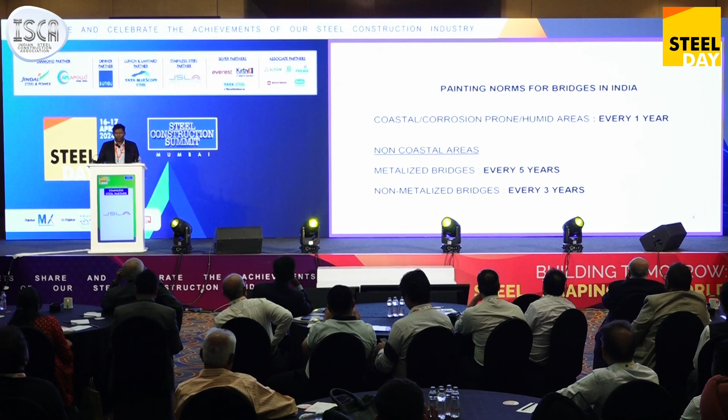So these are the norms of painting or maintenance of bridges in India. In coastal regions, it is mentioned every year, and with metallizing, we have 5 years of maintenance, and non-metallizing every 3 years. But despite all these efforts, bridges fail, and the average life of a bridge is only 60 years.

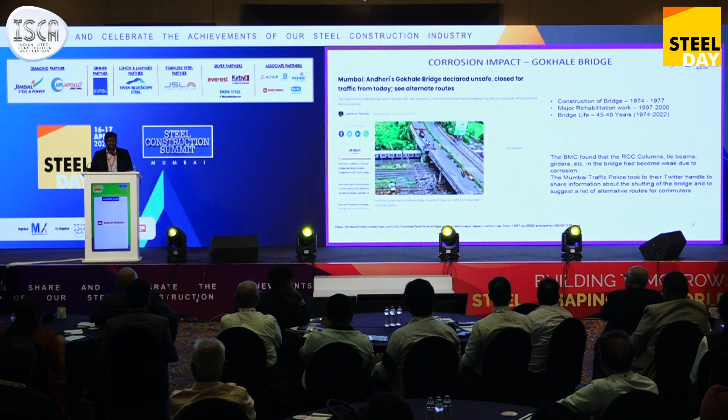Some of the examples I would like to highlight here. One is Gokhale Bridge, which was initially designed for 60 years of design life. However, now it is getting replaced after 40 years of life, even though it had a major repair work after 20 years of service. So IIT has mentioned that corrosion is a main concern, and that is why the structure is not in good condition.

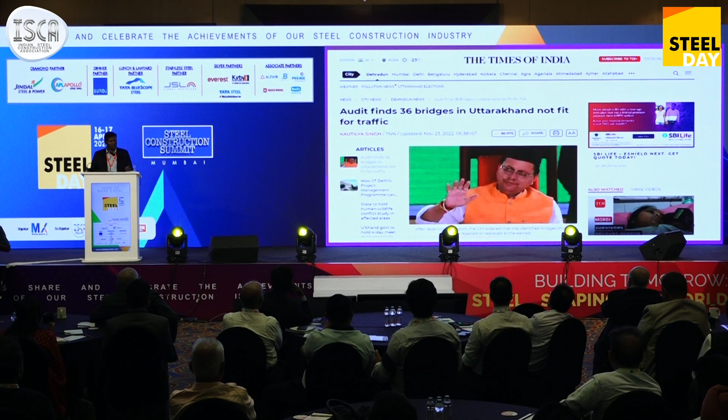And some more examples of corrosion related issues - these are some of the news articles. There is a big need of a better material, how we can counter this.

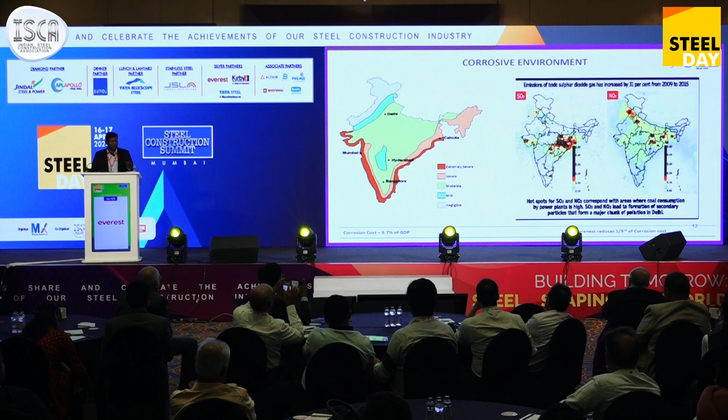And this corrosion map we have seen many times. You can see it has been classified into extremely severe, severe and mild conditions. The right side image is the pollution map of India. When it combines with the corrosion atmosphere, the maintenance requirement is increasing and the service life reduces. And corrosion is a cost, and it can be reduced by 33% if you go for a better material, as per the studies. So is there a solution?

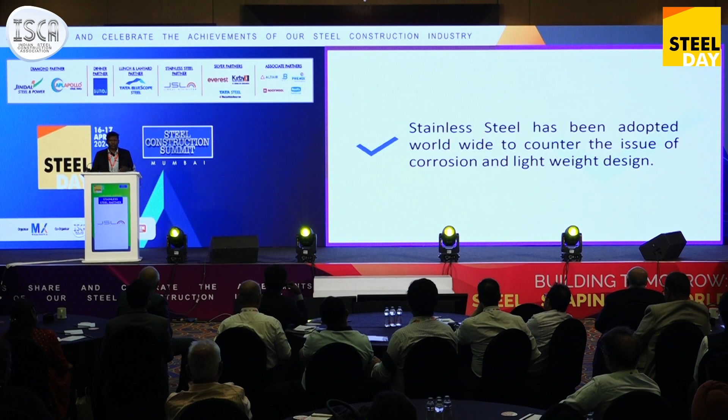Yes, we have a material: stainless steel. Worldwide, this has been adopted to counter the issue of corrosion and reduce maintenance. And for those who are new to stainless steel, here is one slide for you.

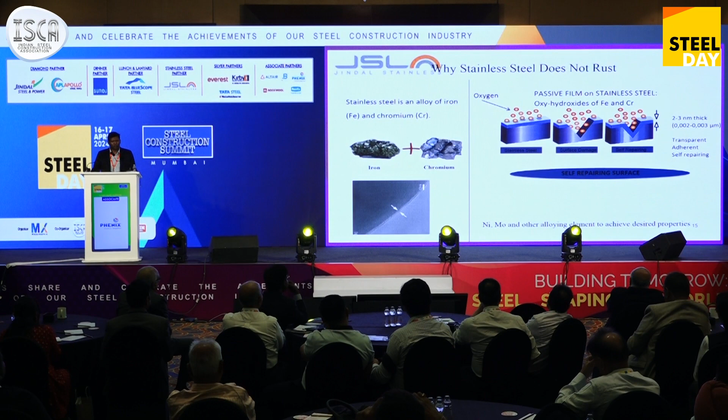Stainless steel is nothing but an alloy of iron and chromium. When chromium is added, it forms a chromium oxide layer on the surface that protects the material from getting corroded. Even if it gets scratched, the chromium available inside the material combines with atmospheric oxygen and forms a chromium oxide layer. So it is a self-repairing film which forms. It is not visible to the naked eye, but it protects the material.

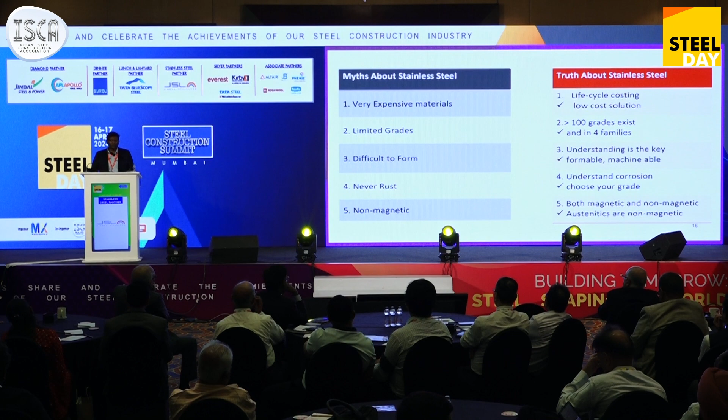It never rusts, stainless steel - again, it is about understanding the atmosphere and the situation, the location where it is going to be used. Right selection of material is also important. Many times we misunderstand stainless steel as non-magnetic - that is not the case. There are both magnetic as well as non-magnetic grades existing.

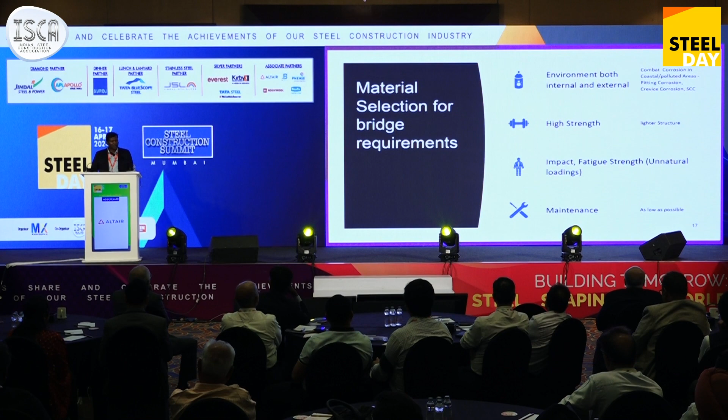For a structural consultant, these are some of the factors they consider before selecting a material for bridge applications: where it is going to be used, whether the structure can be light enough, and for cyclic loading, it should withstand, and maintenance should be as less as possible. And stainless steel fits the bill.

It offers all the advantages of being maintenance free. With higher strength, you can reduce the structure weight, and it is also sustainable. We will be talking about it in detail. These are the four different major types of stainless steels: classified into austenitic, ferritic, duplex, and martensitic.

For selection of a stainless steel grade, there are different factors. One is cost, because the higher the alloying element of a stainless steel grade, the cost is going to be higher. So right selection of the alloy is important, and degree of corrosion is also important. What is the design life we are expecting from the structure, and what is the strength level we are expecting.

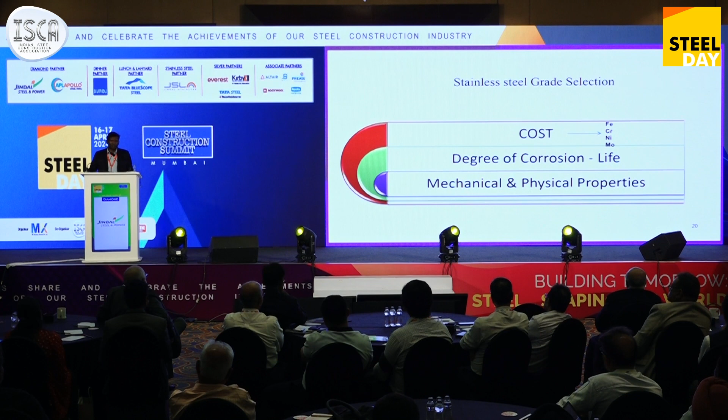So these are some of the five commonly used grades for structural application. The first one is the 300 series. It offers very good corrosion resistance but lacks strength. The bottom one is duplex stainless steel, which offers high strength as well as corrosion resistance.

The middle one is IRS 350 CR grade. It has been recognized as a replacement for carbon steel with a design life of more than 100 years. And railway has given this name IRS 350 CR - IRS, Indian Railway Specification; 350 is the strength; and CR is corrosion resistant.

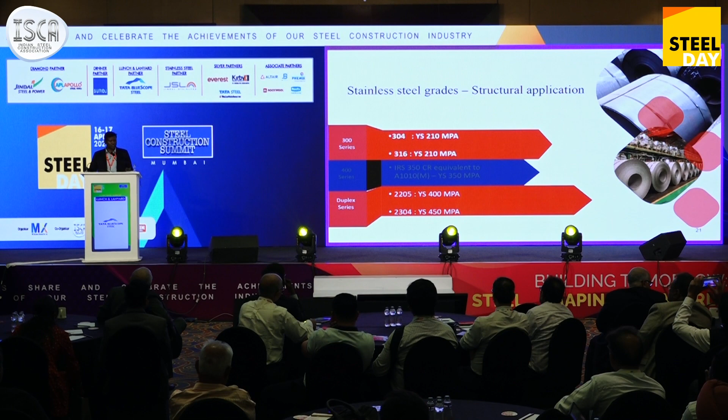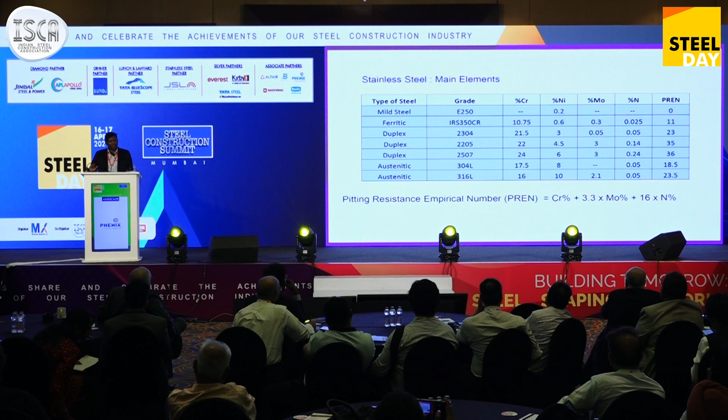PREN - this is the formula, pitting resistance empirical number. To simplify it, the higher the PREN number, the better the corrosion resistance of a material. So even though the ferritic variant IRS 350 CR is less than other stainless steel variants, it is almost 11 times better than carbon steel.

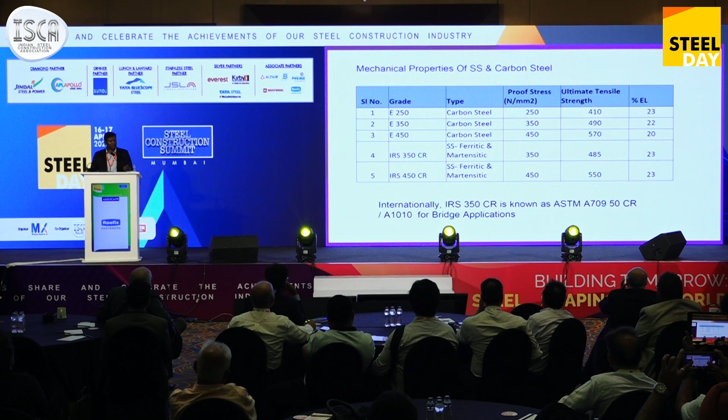Strength-wise, mechanical property-wise, if you compare, stainless steel grades offer better performance with better toughness as well. These are some of the performance results of IRS 350 CR conducted by IITs and other major institutes. It is almost 50 times better than carbon steel.

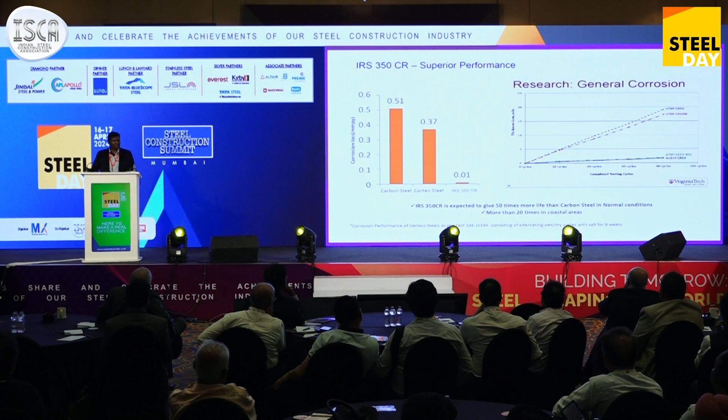In terms of fatigue properties, it is also similar or better than carbon steel, and fire performance is also better than carbon steel. It can withstand the strength for a much longer time in comparison to other materials.

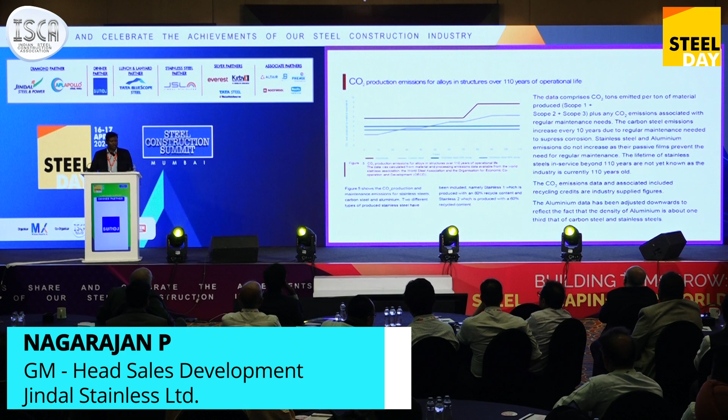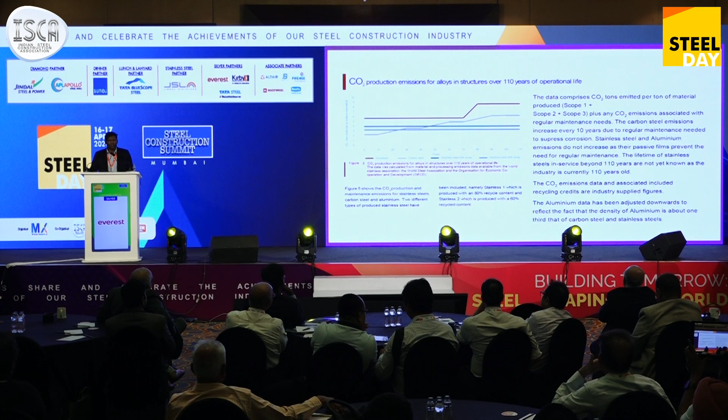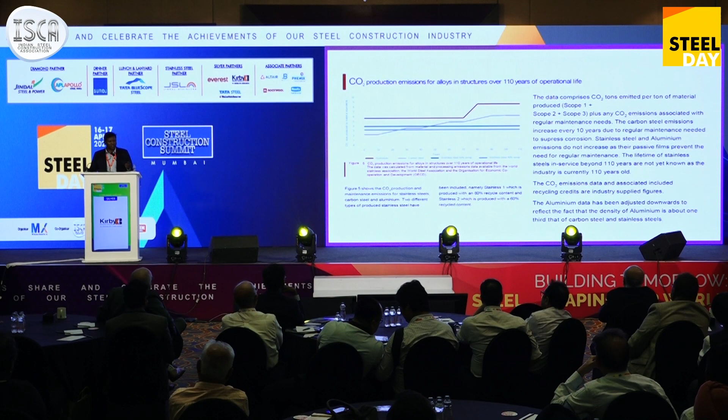Yesterday our director was mentioning about sustainability, and even though carbon emissions are not the only criteria for talking about sustainability, carbon emissions can be reduced by almost half by going for stainless steel over a service life of 110 years. These are the data released by the World Stainless.org website.

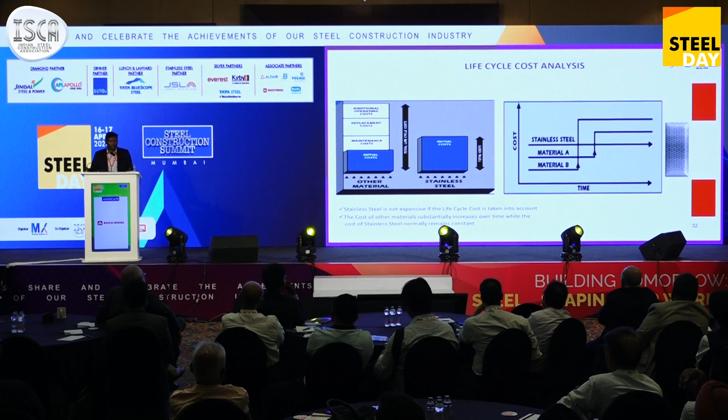I'll skip this - life cycle costing I was mentioning. If you compare the initial cost, maintenance cost, replacement cost, and end of service life cost for stainless steel versus other materials, stainless steel scores better. Even though the initial cost may be slightly higher, during the service life, if you account for all the calculations, it comes down, and it is possibly the cheapest solution.

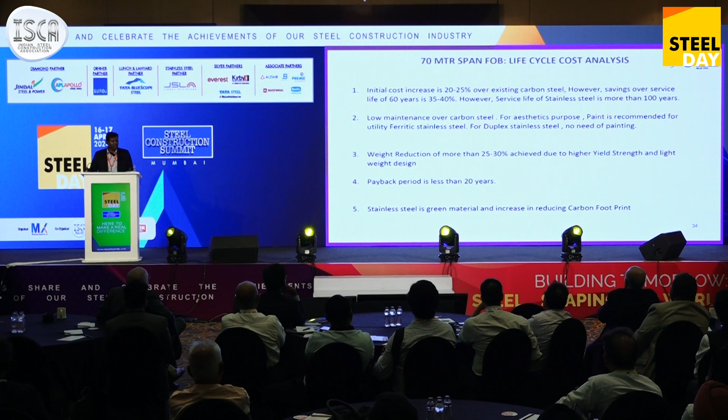There is also a policy issued by the Ministry of Finance to use LCC principles to finalize any construction project. This is the first project approved by railways, and they have done the LCC calculation. This is done by railways.

This is the actual case study of LCC for one of the projects, Bhayandar station. You can see the initial cost increase is not beyond 25% if you compare steel to steel, and the overall project cost increase is less than 5%.

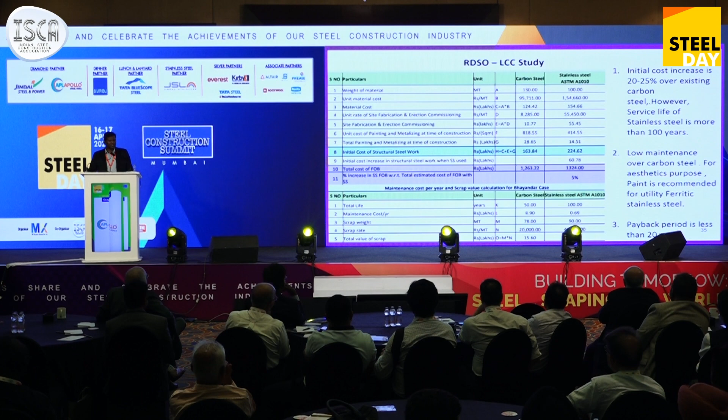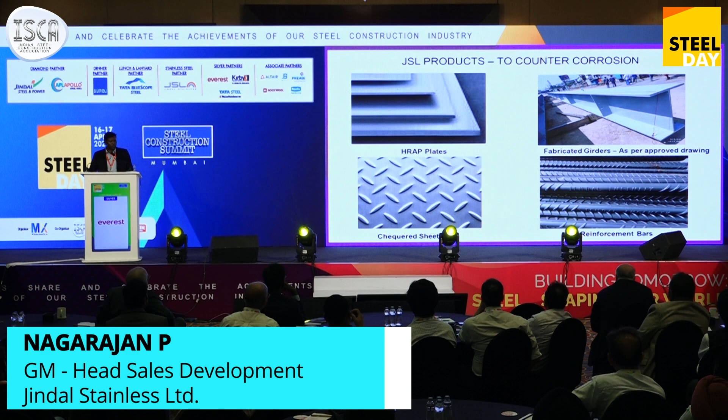Some of the Indian initiatives we have done so far - at Jindal Stainless Steel, we offer the following products to counter corrosion issues. First, we started with stainless steel plates. Then we got into fabricated components as well. Now we offer fabricated girders under the JSL brand. We also have stainless steel rebars and stainless steel checkered plates. I'll take you through one by one.

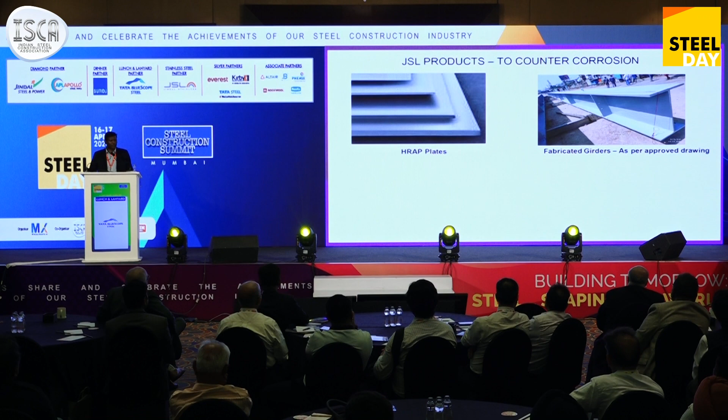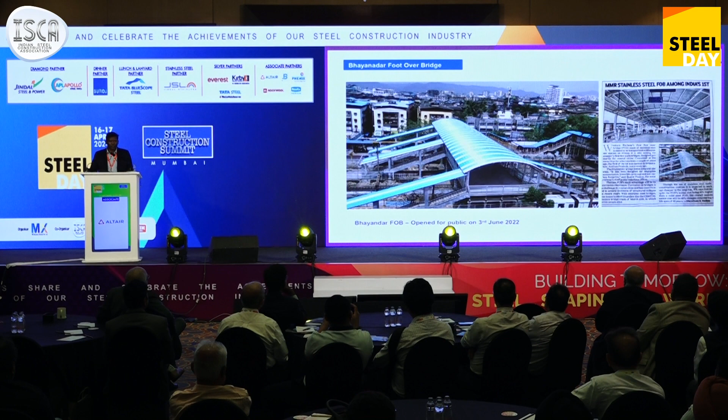Naupada and Srikakulam - these are the first FOBs inaugurated and they are in service. And Bhayandar, that is in Mumbai. You can go and have a look; it is also open to the public.

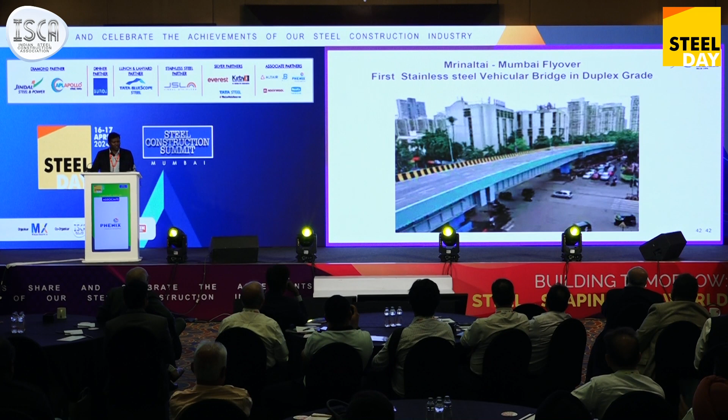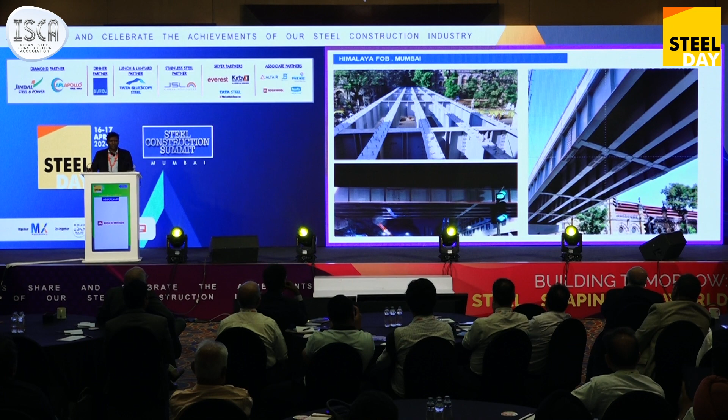Not only foot over bridges, even road bridges are also being constructed. This first project is also completed with duplex stainless steel. Here are images of it. The Himalaya FOB at CST station, which had a failure, that project is also completed with stainless steel.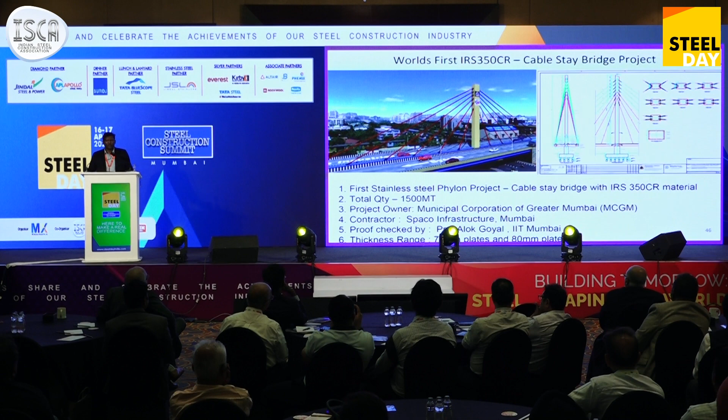This is to give you confidence that even though we have started with a small FOB now, we can get into road bridges, flyovers, and road over bridges. Not only bridges, even buildings are now using stainless steel.

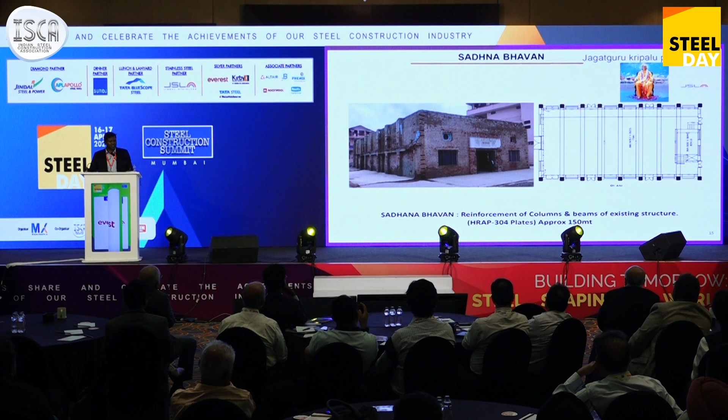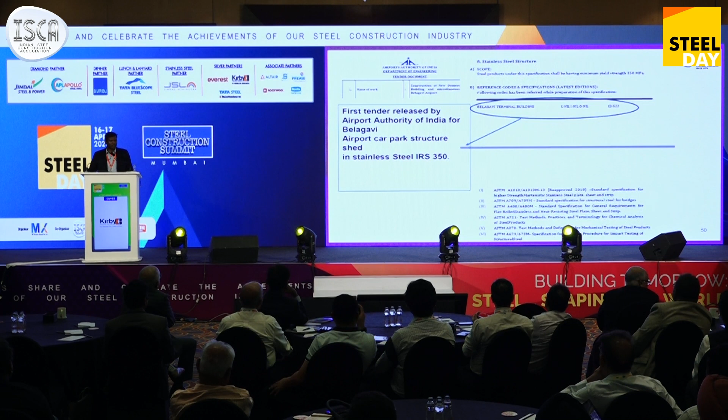This is one of the projects. Now they are strengthening it with stainless steel. Airport Authority has also issued a tender as a trial project for entire car parking with stainless steel tubular sections. The first stainless steel building has also come up in India, in Chennai, at United Insurance Company's headquarters. All these diagrid structures are load-bearing members and are made of stainless steel 316L grade.

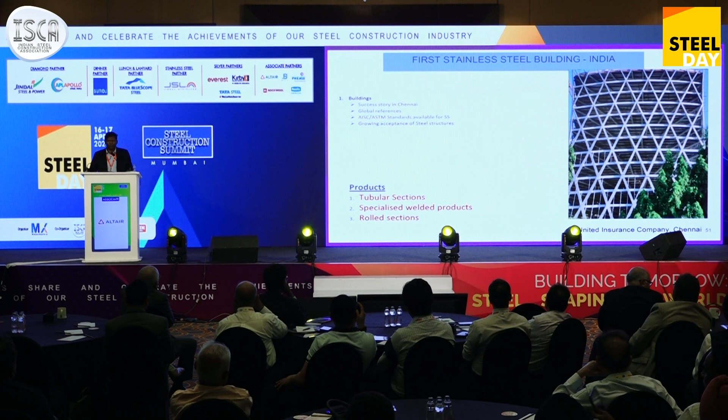There are a lot of policy issues and policy letters issued by different agencies. Railway has issued the first letter on using stainless steel in corrosion-prone areas for FOBs as well as ROBs. Schedule of rates are also available. Madhya Pradesh PWD has issued a schedule of rates for stainless steel plates, girders, as well as rebars and checkered plates.

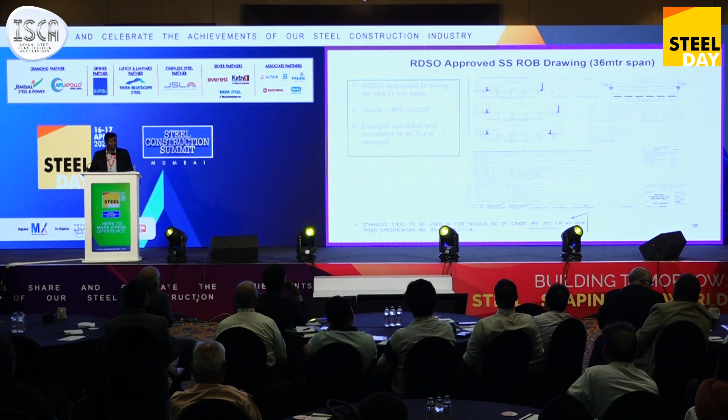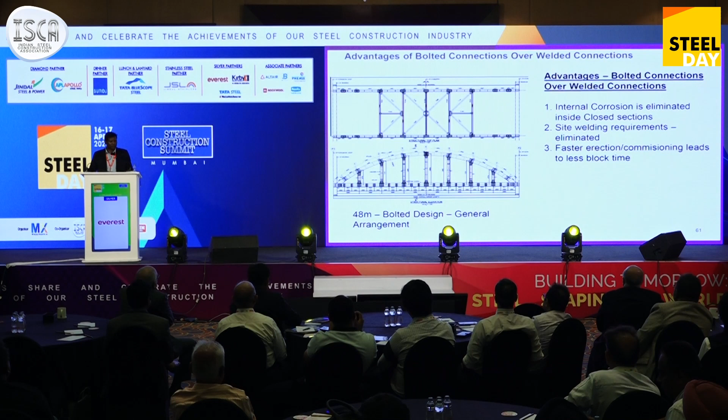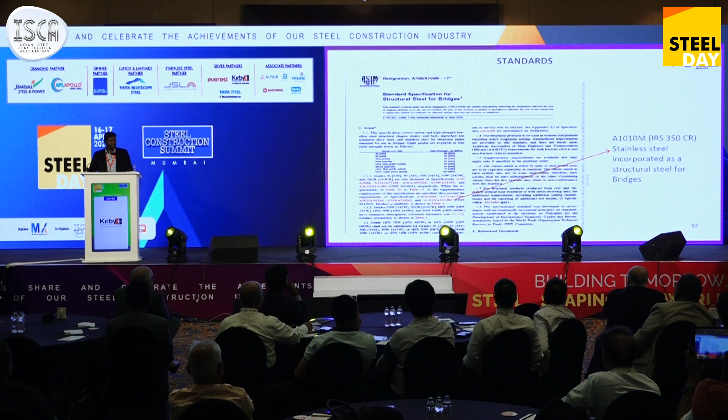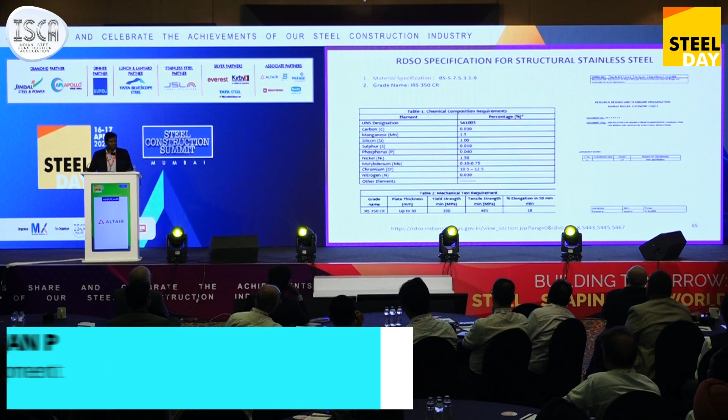These grades are not very new. This material is already a part of international standards. ASTM A1010 is the grade name given by ASTM standards, and this is also part of the bridge standard. RDSO has already issued a technical specification for using stainless steel. This information is available on their website as well, and anybody can download it. The welding process and fastener usage, everything has been mentioned in that technical specification.

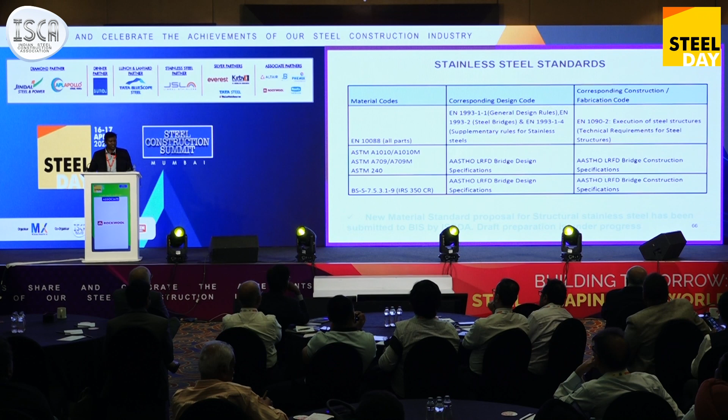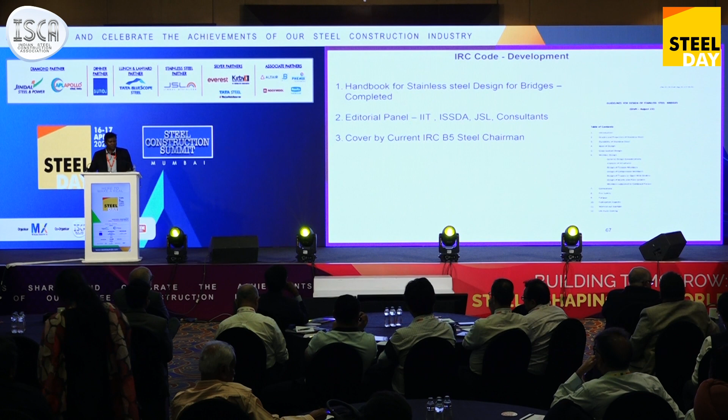The Indian code standard is under development. The draft standard has already been submitted to BIS. Testing is going on, and within about 6 months we are expecting the Indian code to be released for stainless steel usage in structural applications as well. Not only BIS, even the IRC is interested in developing a handbook for designers and structural consultants for using stainless steel, and the draft has already been developed. In the upcoming IRC conference in the month of June, it will be released.

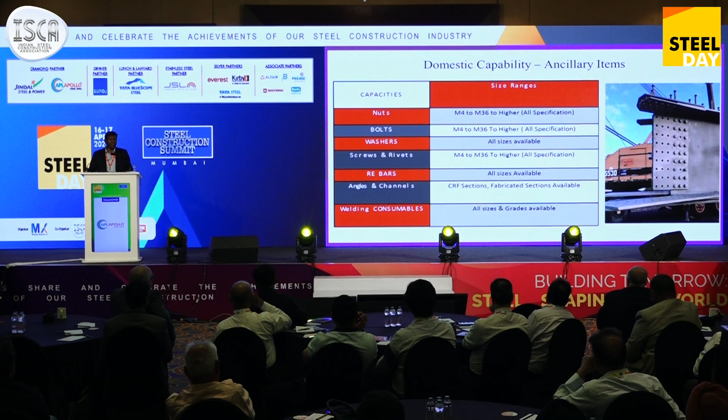A lot of fabrication manuals and the whole ecosystem already exist. A bridge cannot be completed only with plates and girders - we need nuts, bolts, consumables, everything is available. And if anybody finds difficulty, we are there to help.

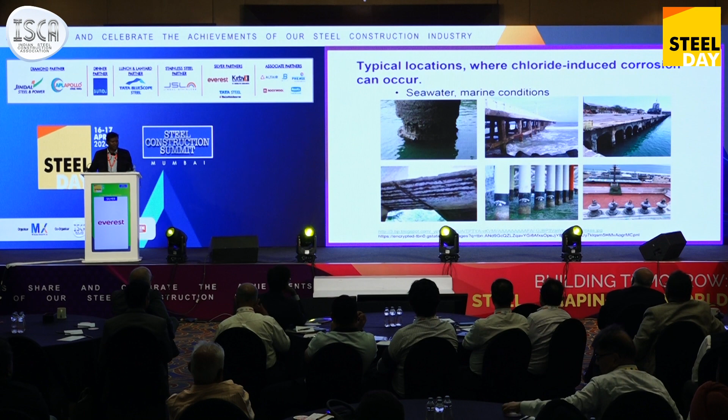Stainless steel rebar is the other product we have been supplying to different projects. Indian standard is already available, with almost 7 grades in the system. It is available at the same strength levels as carbon steel rebars, but we don't have the D variant of stainless steel rebars because stainless steel offers better elongation, more than 20%, even though the code requires only 14.5%.

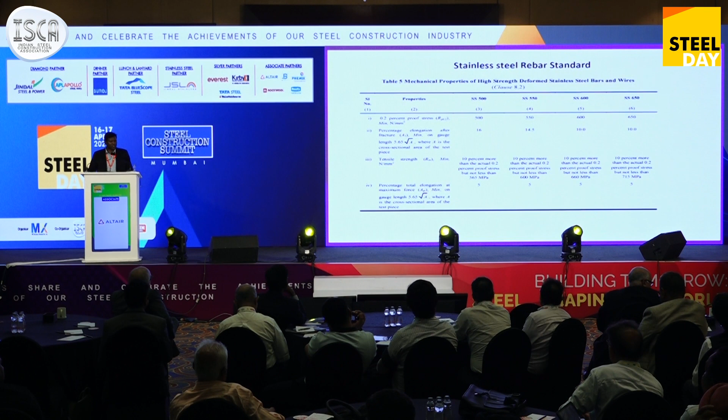Policy letters are also available from railways for use up to 30-kilometer radius, recommending stainless steel rebars. Even highways have made stainless steel use mandatory up to 15-kilometer radius, and it is also in the process of being increased to 50 kilometers.

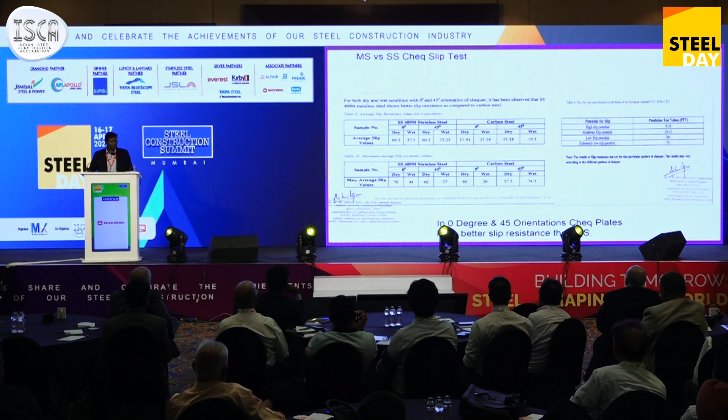The last product, covering 1 or 2 slides, is checkered plates. Now all the properties are better, be it wear resistance, slip resistance, or abrasive wear resistance. RDSO has issued a policy letter on using stainless steel checkered plates in all the pathways on bridges.

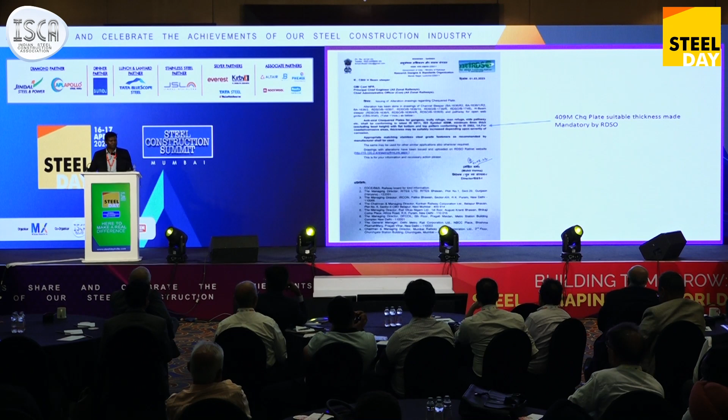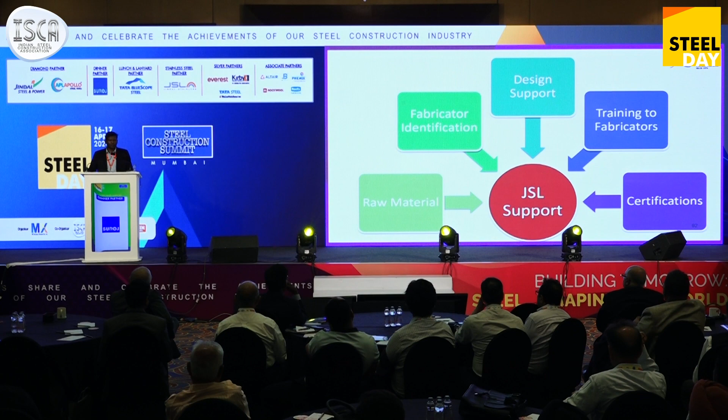We at Jindal Stainless are not limiting ourselves to supplying raw materials - we also hand-hold the fabricators, provide training, give design support to decision makers, and also provide certifications. So for any queries, we are available here, please keep in touch.